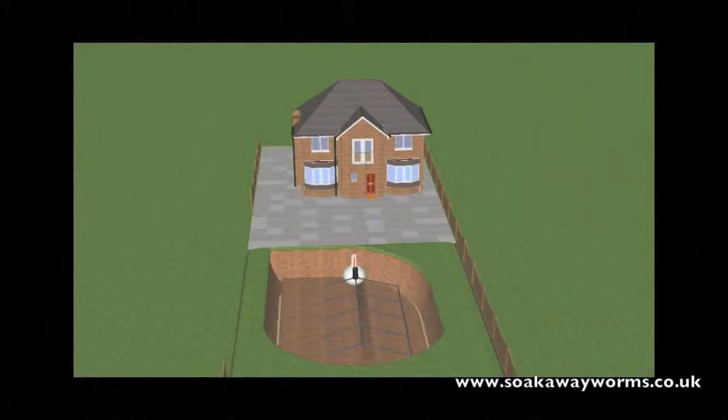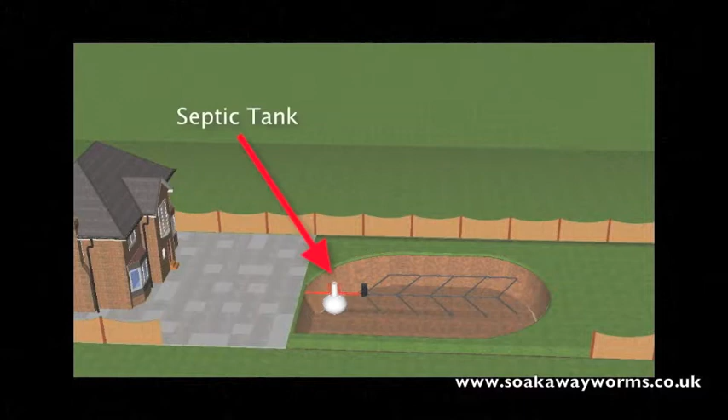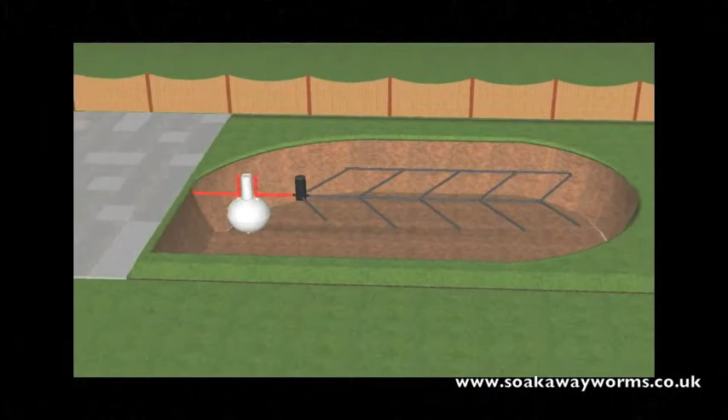So here's the first video. It's called What is a Septic Tank and Soakaway? So what is a septic tank and soakaway? Well, primarily a septic tank is used in instances where the property is unable to connect to the mains drainage or main sewage system for whatever reason. Septic tanks come in a variety of shapes and sizes. They go underground and they're generally made from plastic or fiberglass.

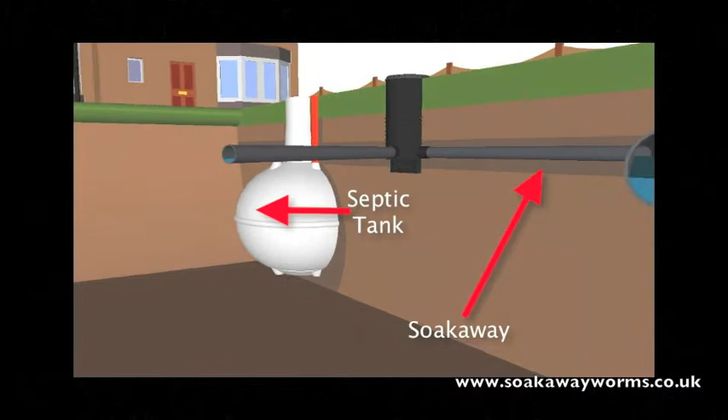Now, every septic tank needs a soakaway. Soakaways can be created in many different shapes and designs. In this instance, we've chosen the herringbone or fishbone design, which is very popular today because of the way that it allows the water to permeate naturally into the soil over a wide area. There's a variety of materials that people use for soakaways, and again in this video we've used the perforated pipe design simply because it's very popular and works very well when underground.

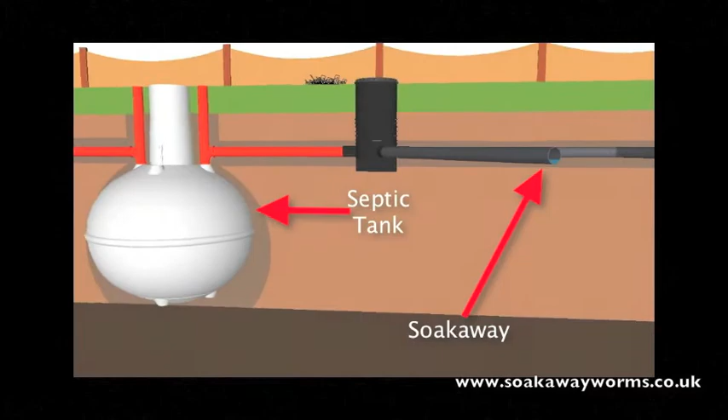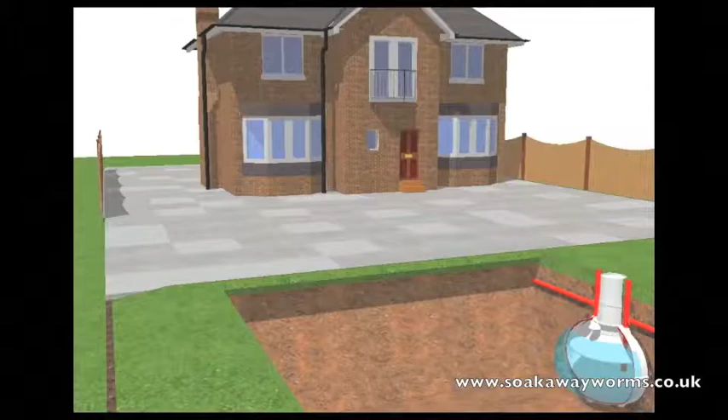Okay, so we've seen what a septic tank and soakaway are. Now we're going to see how a septic tank and soakaway work. All the liquid and solid waste that a house produces, which comes from the washing machine, the dishwasher, the bath, the sink, the shower, leaves the property, goes down the pipe and makes its way into the septic tank.

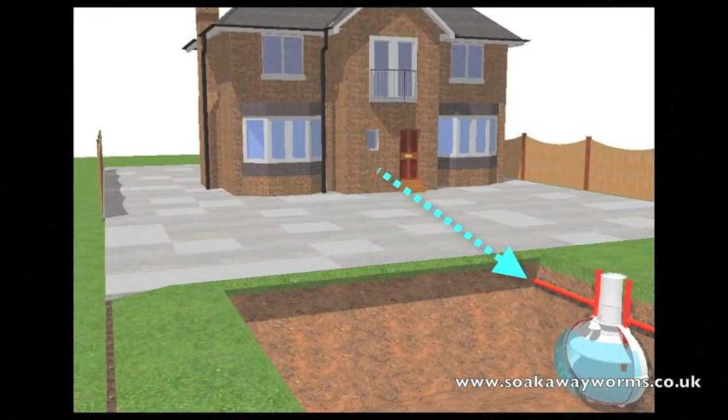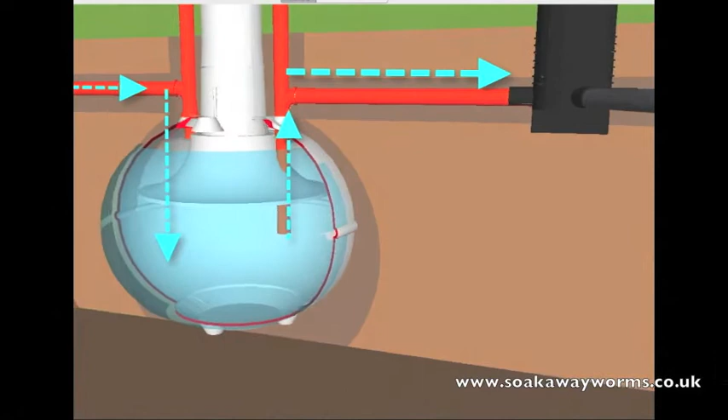All the waste that enters the tank then fills the tank up. Once the liquid reaches a certain level, it then makes its way up through the outlet pipe, along the pipe towards the soakaway. From there, the sewage effluent then makes its way along the entire length of the soakaway and down the various branches and arteries.

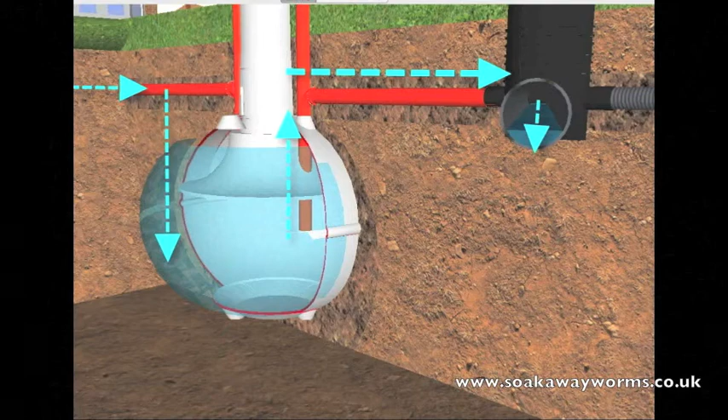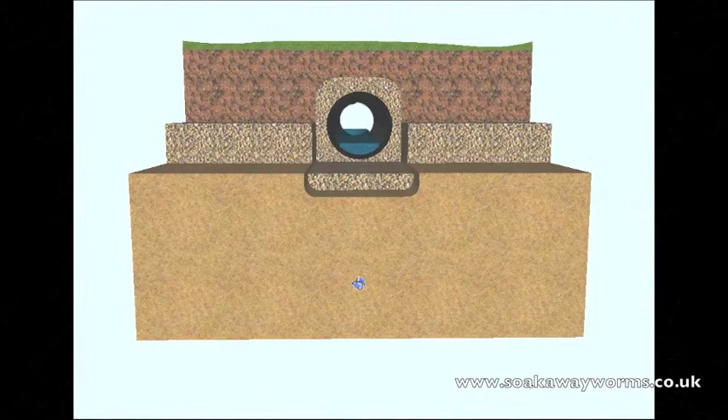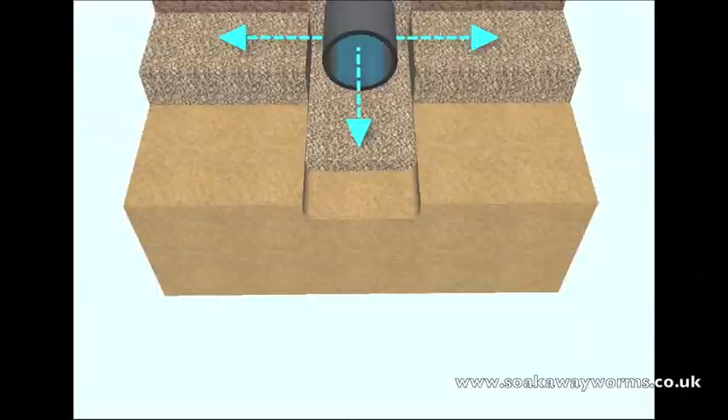Most modern soakaways which use perforated land drainage also use a shingle bed and a shingle covering and a membrane. This allows the sewage effluent to naturally drain from the pipe into the shingle and then into the soil. Okay, so we've seen how a septic tank and soakaway work. Now we're going to look at the sticky problem of why a soakaway becomes blocked.

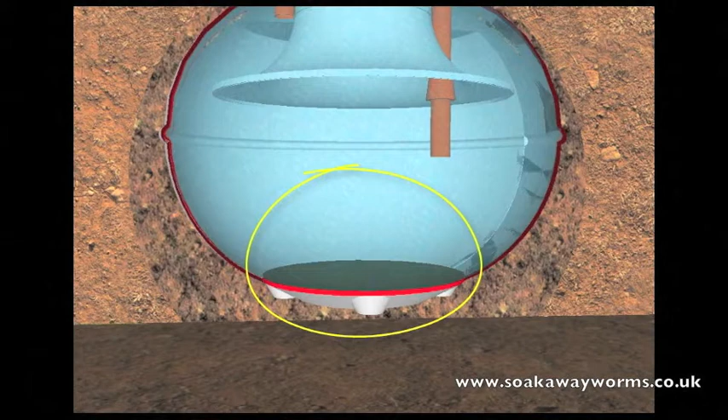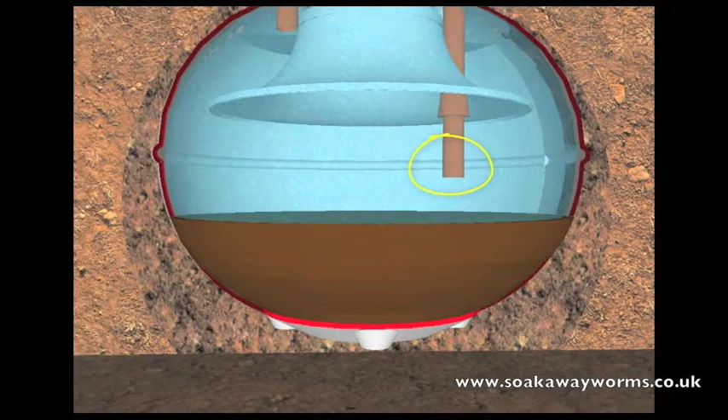All the heavy particles such as the fat and the solids all drop to the bottom of the tank. Over time, the more fat and the more grease and the more solids that fall to the bottom of the tank cause a build-up. This is why every year people get their septic tanks emptied or desludged. Unfortunately, most people allow this sludge in the bottom of their septic tank to build up to such a height that it reaches the outlet pipe that leads towards the soakaway.

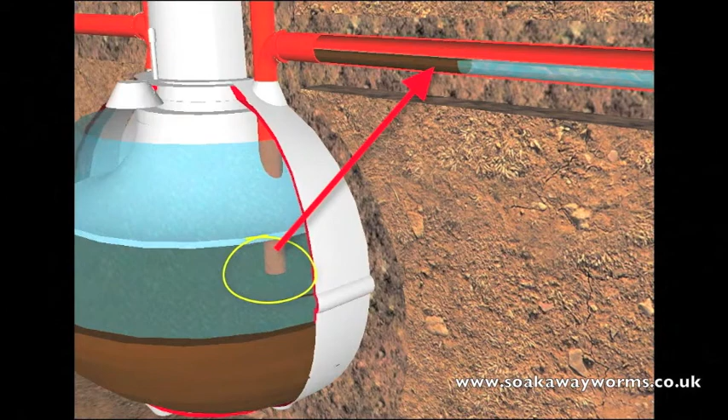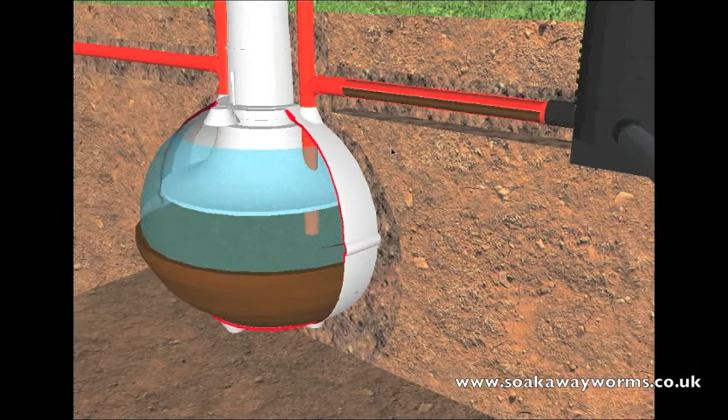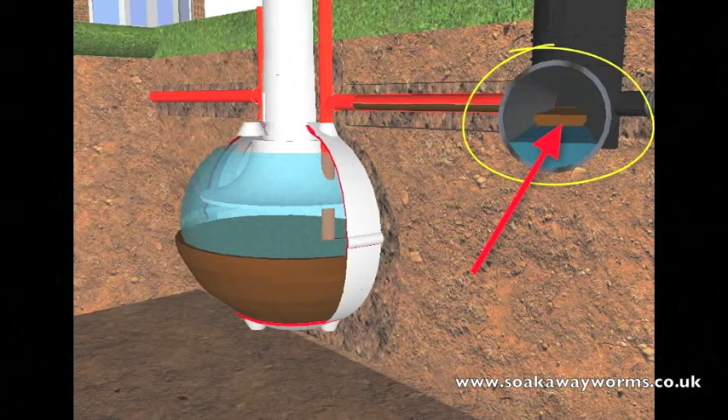And from there, the sludge makes its way up the outlet pipe and then along the pipe from the septic tank to the soakaway, completely clogging and blocking up the pipes as it goes. Once the silt and the sludge start making their way into the soakaway, it starts blocking all the pores up and all the arteries and all the veins of the soakaway as well, making it very, very hard, if not impossible, to clear or unblock the soakaway.

Okay, so we've seen why a soakaway becomes blocked, and at this juncture you've normally got two options. First option, you can keep on getting the septic tank emptied, but for me, that's not a viable option. Why? Because it's not going to unblock the soakaway, and number two, it's expensive to keep getting the septic tank emptied.

You can try rodding the soakaway, but rodding the soakaway or jetting the soakaway doesn't help. Why? Because if you keep jetting the soakaway, it just compounds the issue. If you rod your soakaway, the rods just poke through the grease and the grime. They don't actually unblock it.

The second option you've got, which again isn't a favourite of mine, even though I've been installing and repairing systems for about 14 years now, you can get your system repaired or replaced. But again, this costs thousands of pounds, and the reason I've done this video is to show you a better way.

Okay, so what's this amazing product then that's not only going to fix your septic tank and soakaway problems, it's going to unblock your soakaway, it's going to keep it unblocked and reduce your septic tank emptying costs? Well, they're called soakaway worms, and these soakaway worms are having an amazing effect on the customers that use them in their septic tanks and their soakaways. So I've created a short video which shows you how to get these septic tank worms into your septic tank and how they work.

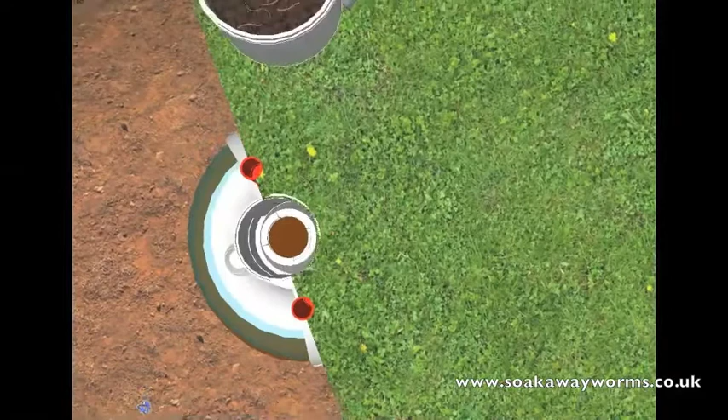Okay, so once your soakaway worms have turned up via special delivery, simply get the bucket of soakaway worms, take the lid off, then take the worms to your septic tank, take the lid off the septic tank, then just pour the bucket of worms into the septic tank.

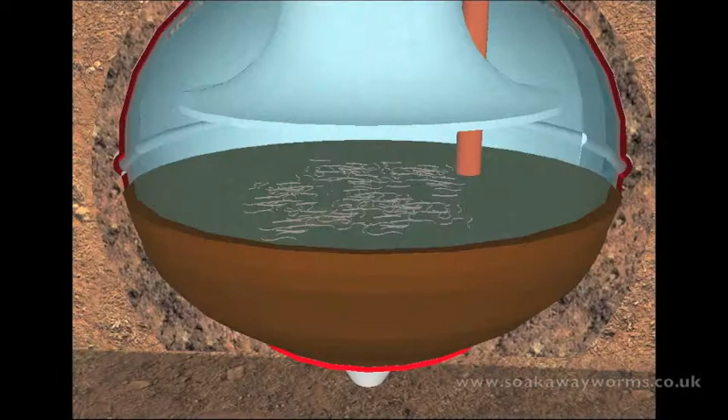Once in the tank, the soakaway worms will then fall to the bottom of your septic tank, and there they'll land on the sludge, and very quickly they'll start to eat, they'll start to breed, and they'll start to multiply. And as they do so, they'll start burrowing and churning and working their way through all the solid and the sludge.

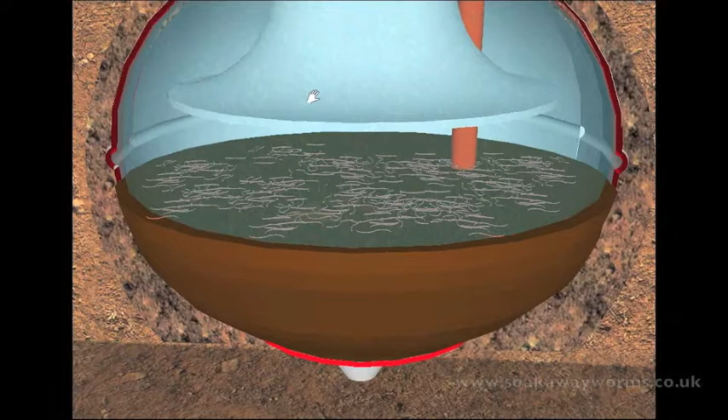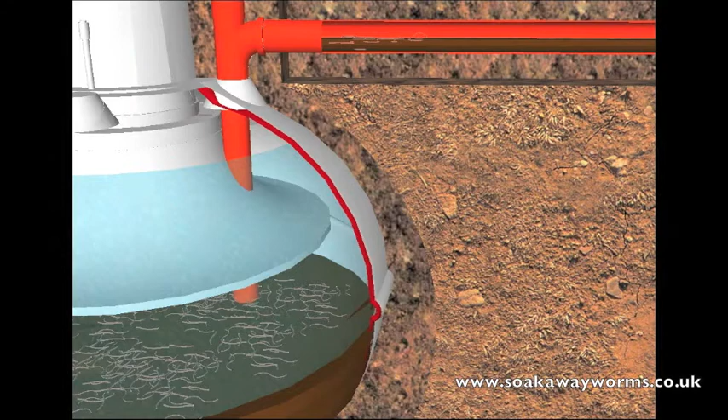Now this process generally takes about 2 to 3 weeks, during which time the soakaway worms will make their way from the bottom of the septic tank up through the outlet pipe, and then again the process continues. They'll continue to eat, they'll continue to breed, and they'll continue to multiply, over which time making their way through from the septic tank towards your soakaway.

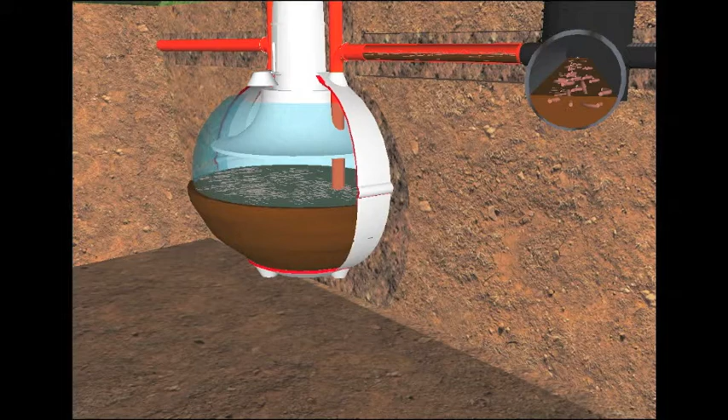And when those soakaway worms start making their way deep into the arteries of your soakaway, it isn't long before they convert and transform that sludge and grease back into a natural, safe, organic, clean liquid again. They do this very quickly.

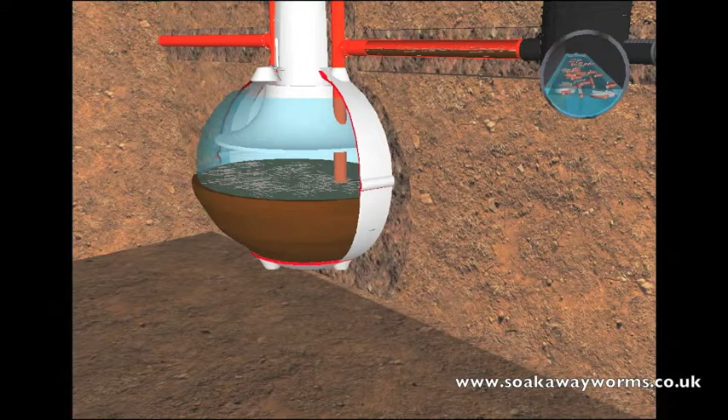Not only will these worms start working and unblocking the pores and the perforated holes that once clogged your soakaway up, they'll start working on the pipes that lead back to and from the septic tank, clearing and removing that sludge completely that has been blocking your septic tank up and the pipes leading to the soakaway for so long now. Once they start doing this, the liquid is able to freely move once again from the house into the tank, into the soakaway, and then to naturally be able to drain away again into the soil.

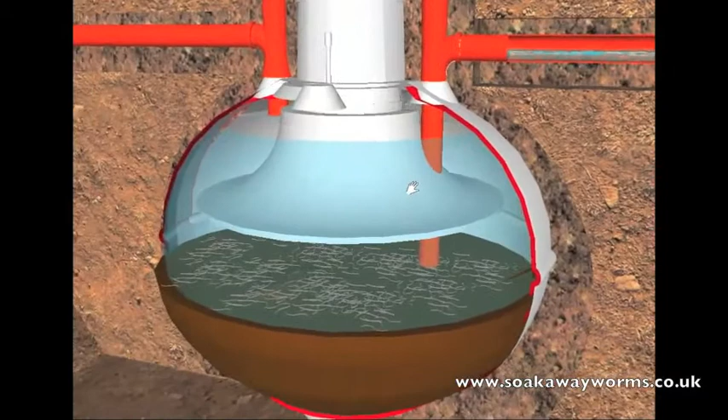Now this is where the soakaway worms really kick in and get clever. Remember at the outset we spoke about that people have to get their septic tanks emptied once, twice a year. Well, because the soakaway worms live in the bottom of the septic tank, they eat all the sludge. So instead of having to get it emptied once a year, they reduce your septic tank emptying times to once every 10, 15 years.

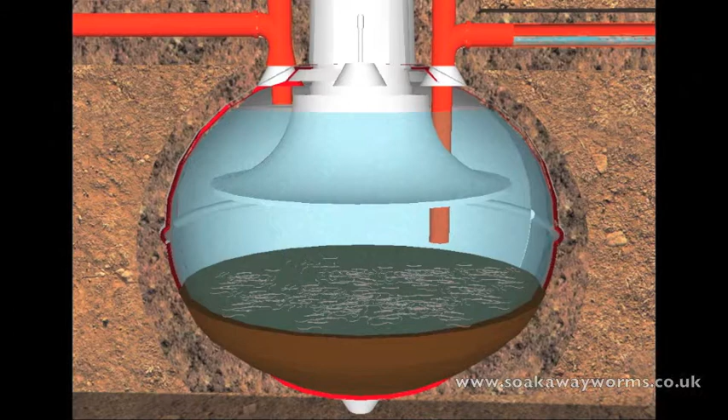So not only do they unblock your soakaway and keep it unblocked, they also keep your septic tank free from sludge, free from blockages, which means no more bills, no more repairs, and no more septic tank emptying.